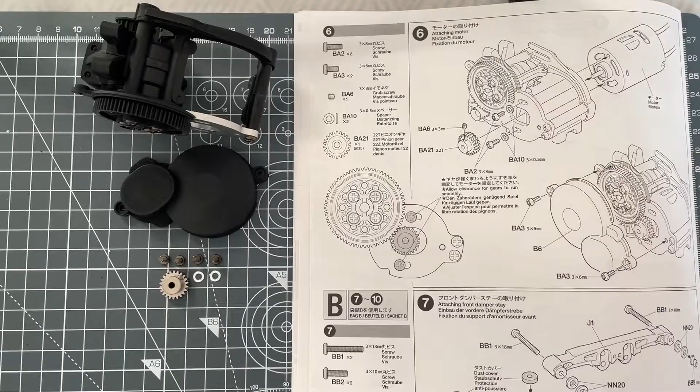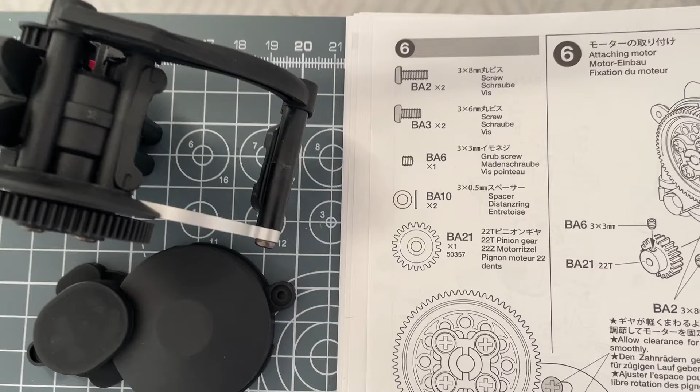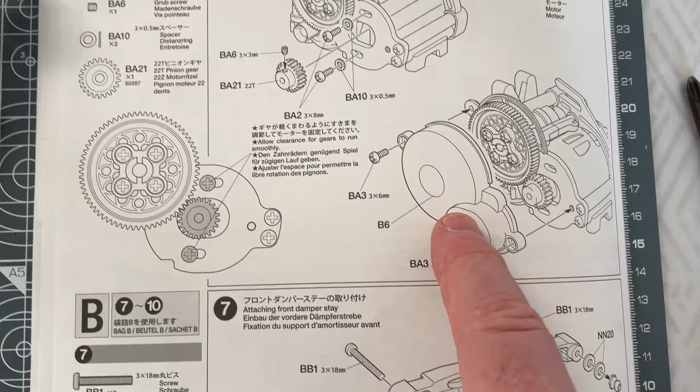Right, so we are now on step 6, and for step 6 we are going to need some more components from the components bag. We're going to need ultimately these BA2s, the 3x8mm machine screws - we need 2 of those, and 2 of the BA3s, which are the 3x6 machine screws. We're going to need this little guy here, a 3x3 grub screw, the little spacers, the 3x0.5mm spacer, the pinion gear, and the cover, which is B6.

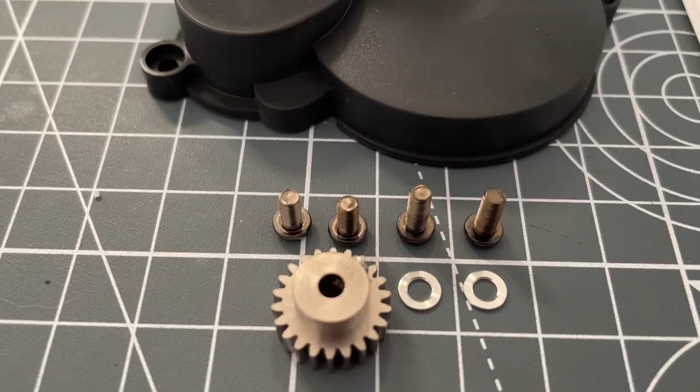We need that, and we're also going to need our motor, and we need to pop them onto the gearbox that we made. So just to show you, there we are - that's the difference between those screws, and there are the spacers. You'll see here, if I focus it a bit more, that I've put the grub screw inside there, ready, so I don't lose it.

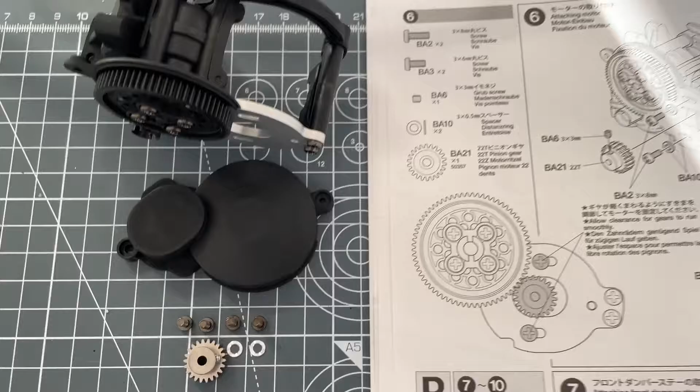So as you know, I'm not using the stock motor - we're going to use a new motor, as you remember. That is going to be my sports tuned motor, so we're going to make this a little bit quicker and see how it goes. All right, so I'll show you how this bit is all done, and we'll put this all together. That's going to be step 6 coming up.

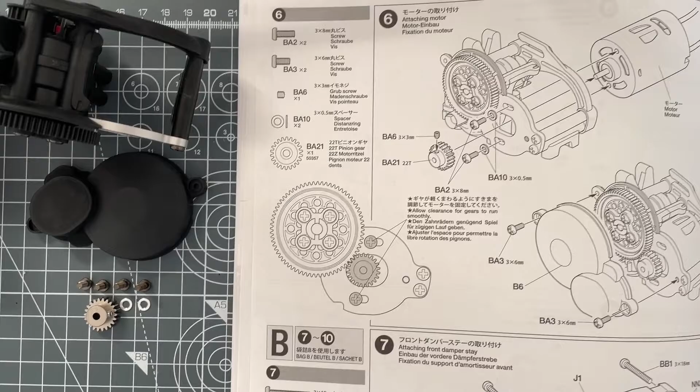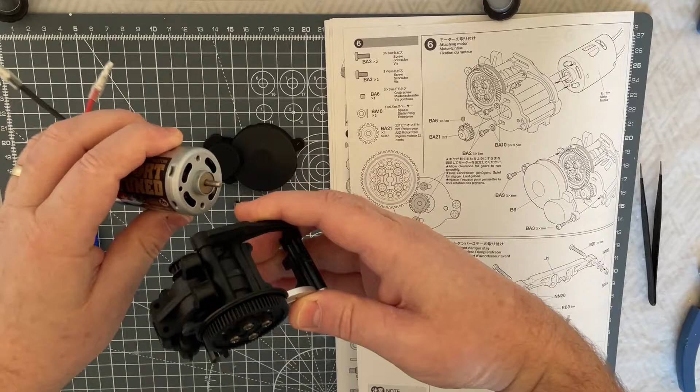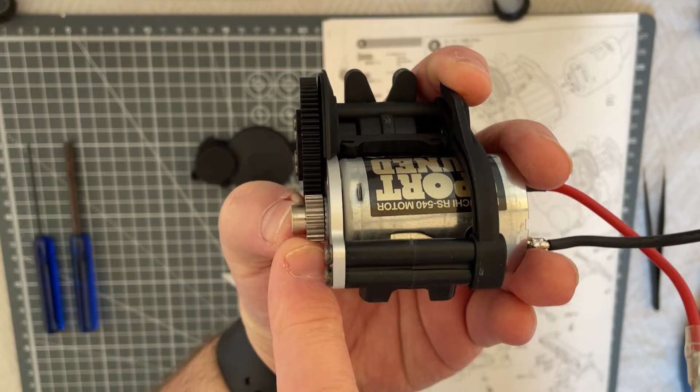So you can see here, if I just put it straight on, it might want a little bit of adjustment. So what I'm going to do is screw the motor in dry without putting any locking thread on the screws for the moment, and then adjust this pinion gear so it sits nicely on the actual spur gear. Once we've done that, we know where the pinion gear should sit. We'll then put this in, so adjust the mesh. So we've got 2 stages to do here.

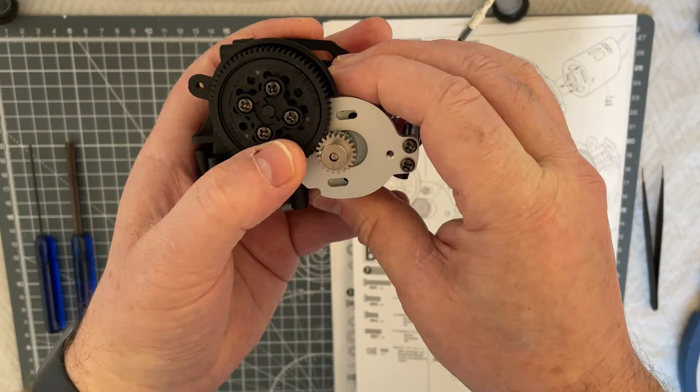We've got to make sure that the pinion is in the right position in relation to the spur gear, and we need to then make sure that the motor is in the right position for the correct mesh and correct place. So 2 steps here, okay, and then we'll put the cover on.

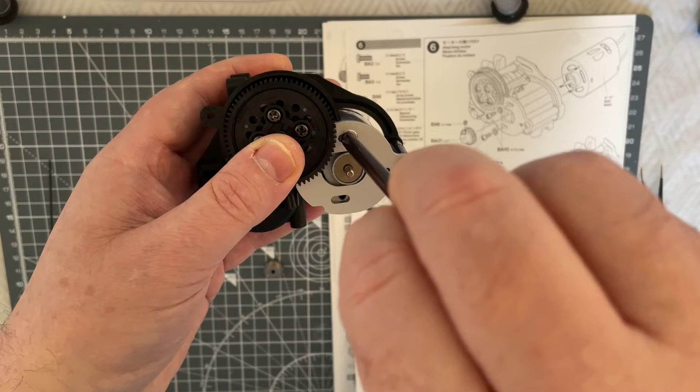Okay, so here we go. Let's put the motor in just dry for the moment so we can get it somewhere near. You don't have to go too mad here, just using the 3x8mm screws with the washer on there, just so you get everything in the right place. We're going to pop that into there, catch a few threads, and pop that down. There we go - we don't need to go too mad here, we just want to hold the motor in place so we know where it is.

So that's there, and what we can do is just back it off just a couple of turns like that, so that we can move the motor.

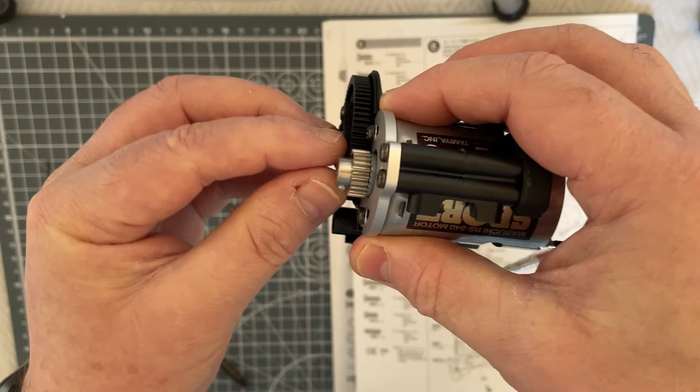Okay, so now we need to pop the pinion gear in. You can see I've already put the little grub screw in ready, and I just want to get that right, so we'll worry about doing the right mesh. Let's see if I can get this on camera, so it looks like it's nicely meshed in the right position - yeah, I think that's about right.

There we go, I think that's about right. Sort of, kind of - you can sort of see if I let it drop, it just dropped a little bit below, which means you put more wear. You want to bring it out so this actually is even and it's level. So there we are, you sort of see it's like that.

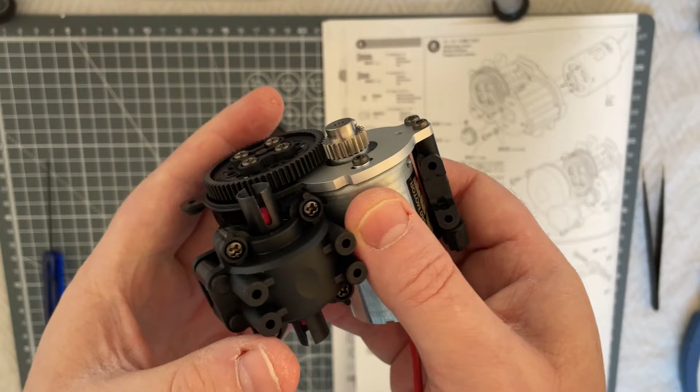Okay, so we're going to now put a thread lock on and lock that in position. Here's my little grub screw on the end of my driver. We just want to squeeze a little thread lock on.

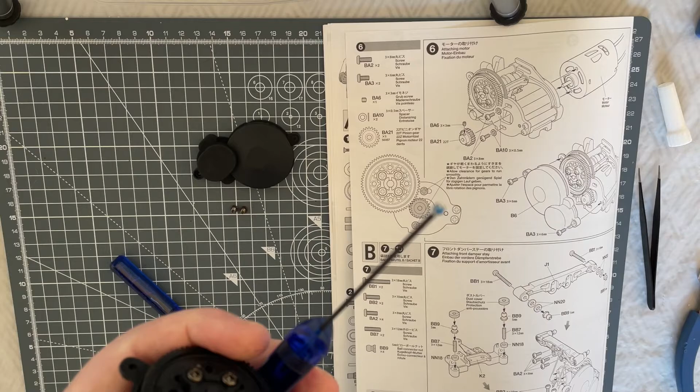Don't need a great deal, just enough to lock it in. Okay, so now we're going to screw this back into the pinion, like so.

We need to make sure that it's on the flat area, so we need to grab the pinion around. I'm just going to make sure it's on the flat correctly. There we are, on the flat.

Now that the pinion is on the right flat, I'm just going to back it off ever so gently and move this pinion gear into position so it lines up.

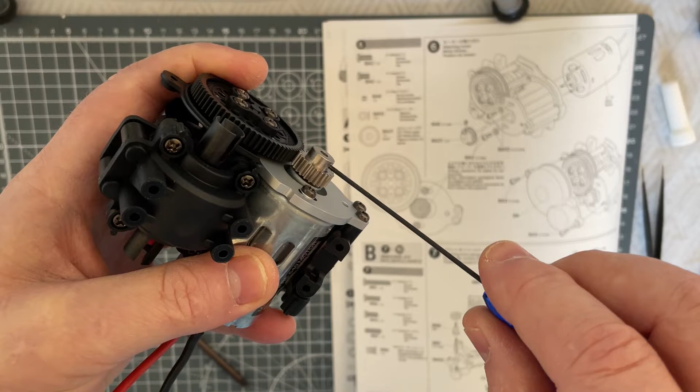Just nip it up, just to get it, and double check it. We're looking to see that that's nicely in line, which I think that is. Looks nicely in line to me. Hopefully the camera can pick that out. Okay, so now we've got it nicely in line. I'm happy with that. Just nip that up. The thread lock will now do the rest.

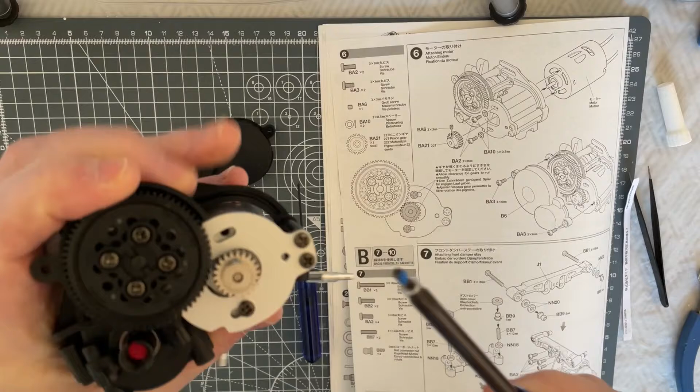Okay, so now we've done that step, we can now do the adjustment of the motor itself. In preparation for this, we're going to take some of our thread lock, put a little bit on the screw and reattach it back into the motor so it's ready. Don't want a lot, just a little bit. I like to make sure that the motor doesn't come loose.

Okay, so that's one of the screws with a bit of thread lock on, and I'll take this one out and put a bit of thread lock on it too, so we can adjust the mesh correctly. So again, thread lock on there, like that. Bring your motor back up, just line up the holes.

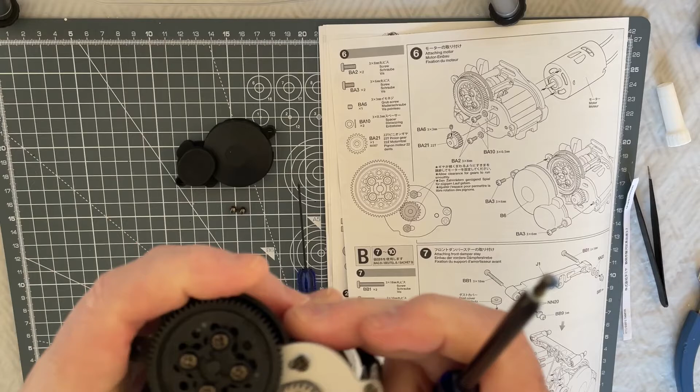I do like the way Tamiya have done this. You can actually line this up nice and easy. Some of the motors you're trying to fight to get in. So now we've got the screws in and the thread lock on there, we can just nip them up ever so gently, and then we'll wait.

So the way I get my gap is I literally put a piece of paper in between and bring the motor down and in between, like that. Matter of fact, I think the paper's quite thin actually, so what I might do is double that over and see what it feels like. You can use a thick piece of paper, but just double that over.

Put the paper in between pinion and spur, push it together until it meshes. There you go. And then nip those up. And then you should be able to... there you go. Yeah, just enough in there, look. And there you go, nicely meshed, should work well.

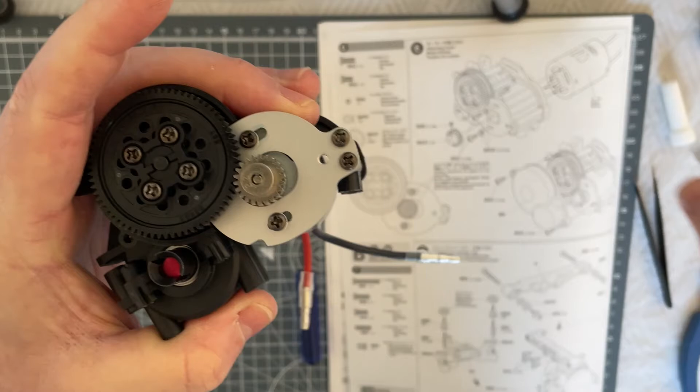You just feel a little bit, yeah, so a little bit of a paper trick. Get a little... there you go, done. So that's the motor now in and ready.

Just put the cap on. Now that the motor is in place, you literally get your cap, place it the right way around, and that goes over the top like that. Get your smaller of the 3mm screws, the 3x6s, pop that into there, like so. And same again here at the top.

And that would technically be finished. There we are. This one goes into plastic, so just be careful when you're screwing that in, like so. Don't have to go too mad on that one, just again nip up, and this one into the metal, done.

There you go, there we are. So now your motor is mounted onto the front gearbox. So that's step 6 now completed.